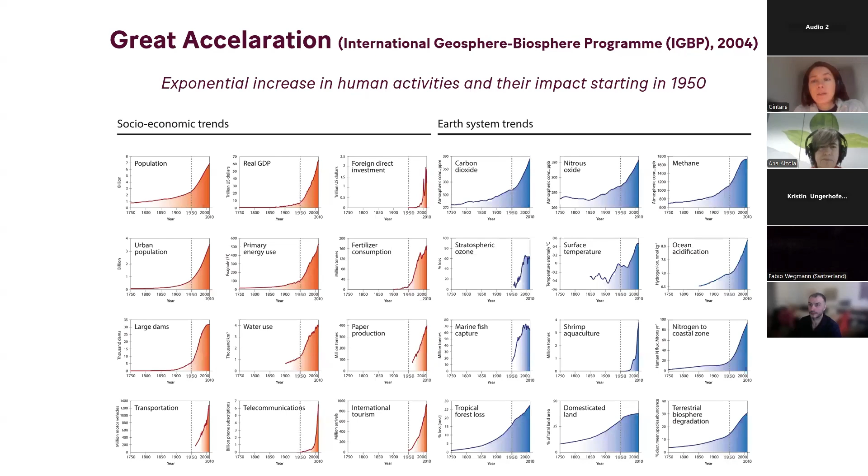So welcome everyone to the session. I will be presenting the results, insights from my recent research project, which is about designing for vital soil in urban areas. First of all, why care about vital soil? We see that since the 1950s, there's an exponential increase in human activities, and these socioeconomic trends have an impact on Earth systems. For example, urban population growth results in soil degradation and more intensive land use.

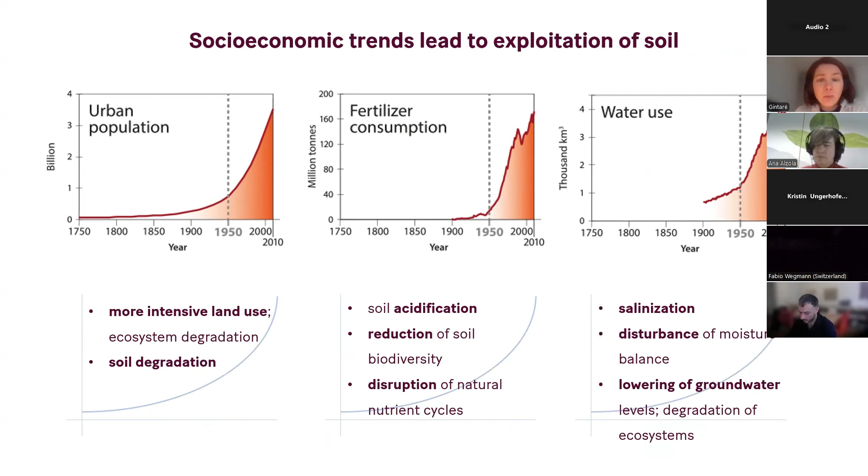Every day in Europe, 184 hectares of land are urbanized. More fertilizer consumption results in soil acidification and reduction of soil biodiversity. Extensive water use leads to salinization and lowering groundwater levels, disturbance of moisture balance. However, vital soils can counteract these negative Earth system trends.

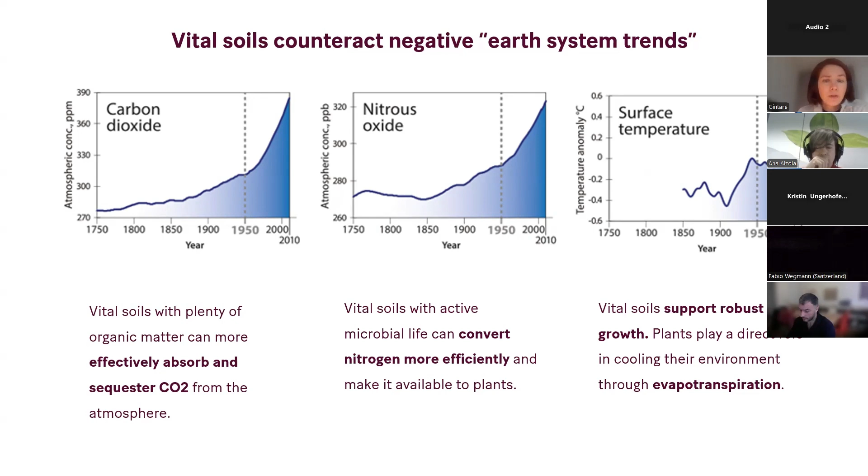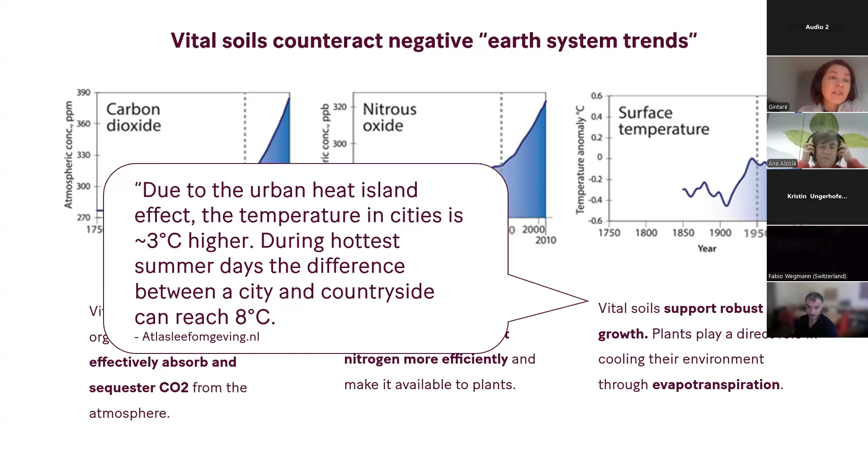Vital soils, especially, can effectively absorb and sequester CO2, also convert nitrogen and make it available to plants, and also support robust plant growth, which is needed to cool the environment through evapotranspiration. And this is especially important in urban areas where we have the urban heat island effect with an average higher temperature of 3 degrees, with extreme cases leading to 8 degrees.

But what happens with vital soil in cities? There is a scarcity of space and lack of insight into what lies underground. Since the 1950s, again, we place in the subsurface everything that we don't want to see above the ground, such as parking, cables and pipes, waste containers. And in the Netherlands, only since 2006, we are actually mapping what's being placed underground.

This leads to overcrowding in the subsurface, and yet we still need more space to put installations in relation to the energy transition, such as warmth and cold storage. And these installations alter soil temperature and the water system, and therefore integral planning of the subsurface is crucial for sustainable city design.

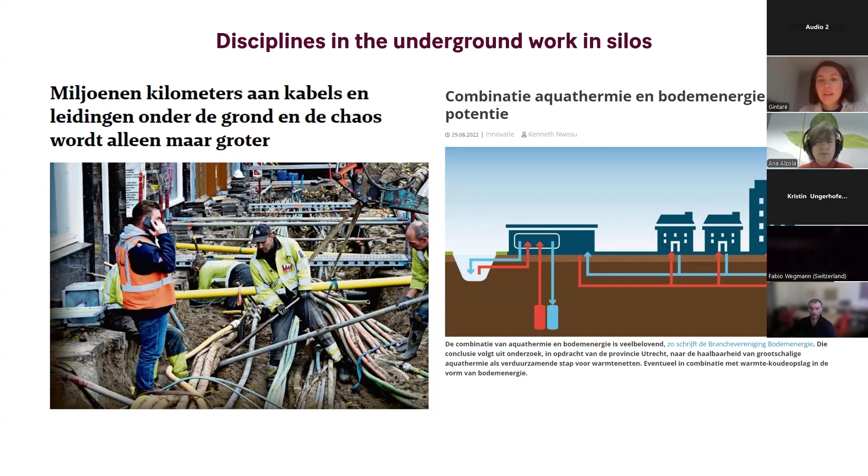On top of all these issues, cities also have high ambitions to make their environments more attractive and healthy for people to live. And there is a wish to add more green, make cities more nature inclusive, climate adaptive. And all these ambitions require more space underground for the vital soil. So with this, we started the research with this question: how do you design for the vital soil?

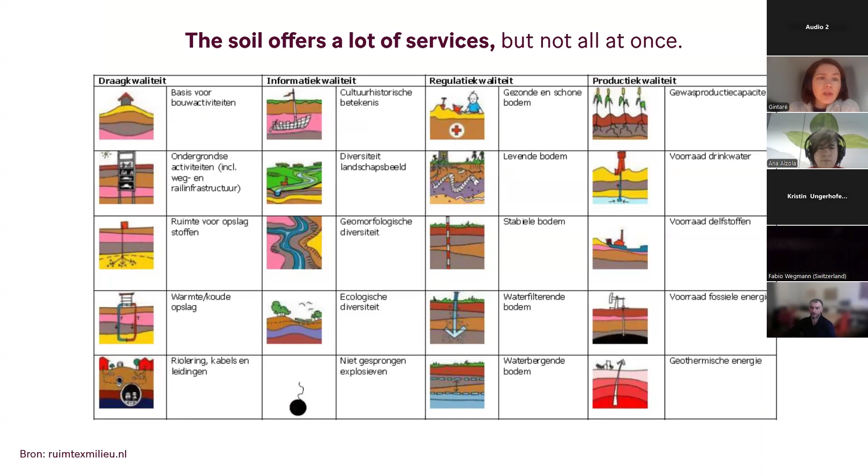We did this research with a large group of experts, which resulted in the handbook on designing for vital soil in urban areas, which is publicly accessible online. At the beginning of the research, we were confronted with the question, what is actually a vital soil? And we know that the soil can offer us lots of ecosystem services, but not everything at once.

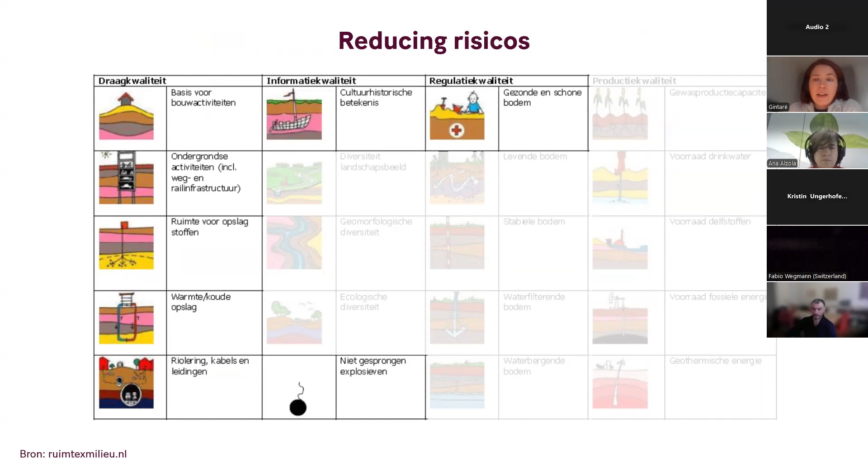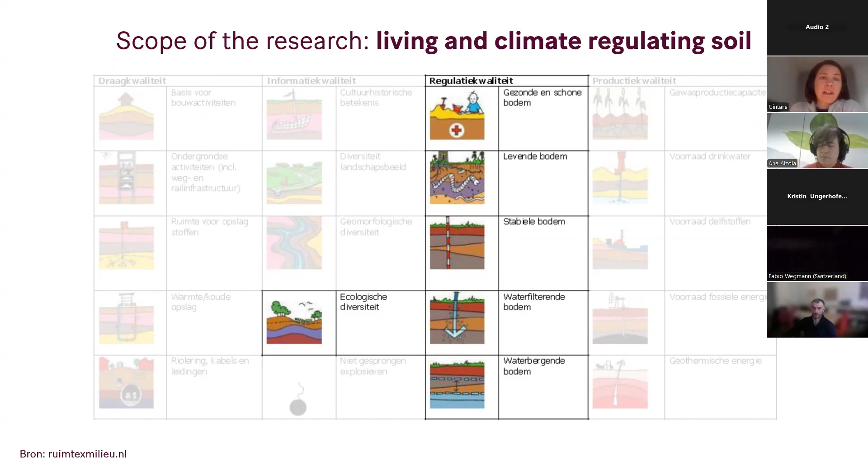We can choose to focus on productive services such as food, drinking water, energy. We can let soil carry our buildings and infrastructure, reduce risk such as pollution, or regulate climate and support our ecosystems. And exactly these services of the soil are our focus area in this research for the vital soil.

So designing for the vital soil starts, first of all, with understanding the site conditions and the soil system in your project area. Then defining ambitions, and on the basis of these two, selecting which measures you need to apply. And this application of measures process is also iterative. You usually sketch several scenarios until the optimized option is achieved.

So how do you read the soil as a designer? Our case is a boulevard in Rotterdam, which represents well the situation of vital soils in cities. 90% of this profile is sealed, and only 10% is green, and this is exactly where we can find, let's say, the richest part of vital soil.

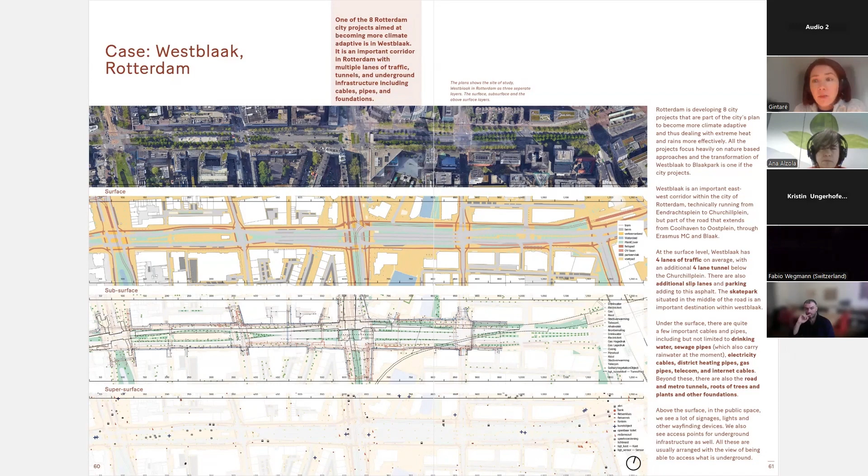Besides the surface cover, we also look at structures underground, such as lines and points, also how the soil was changing throughout time, which then also helps us to understand why certain soil layers are as they are. For example, here, the sand layer was added as a filling of the harbor.

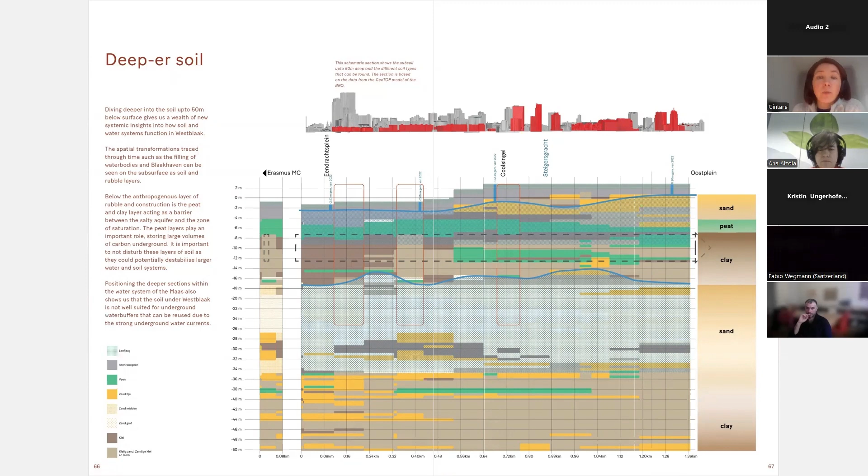We also make a deep soil section to understand the water system, groundwater, aquifers, vertical and horizontal water flows, and soil composition. And then we also zoom in on the shallow surface, because this is the busiest layer in the subsurface. There we find all the infrastructure, and the first 2 meters are the most active with soil life.

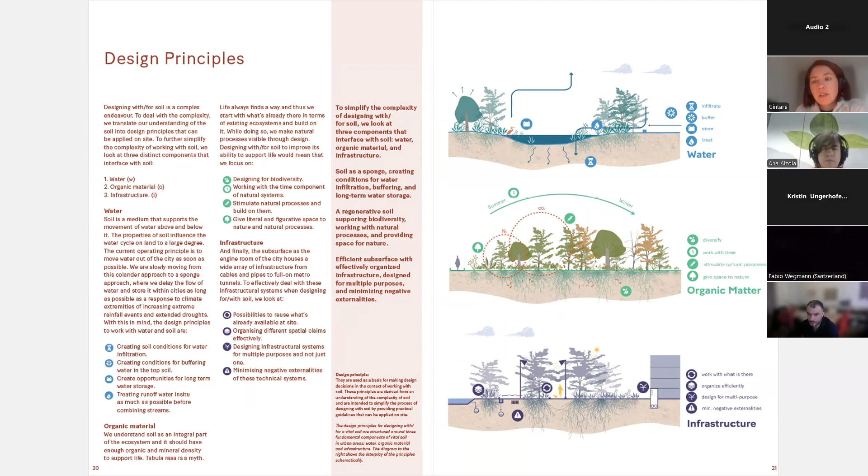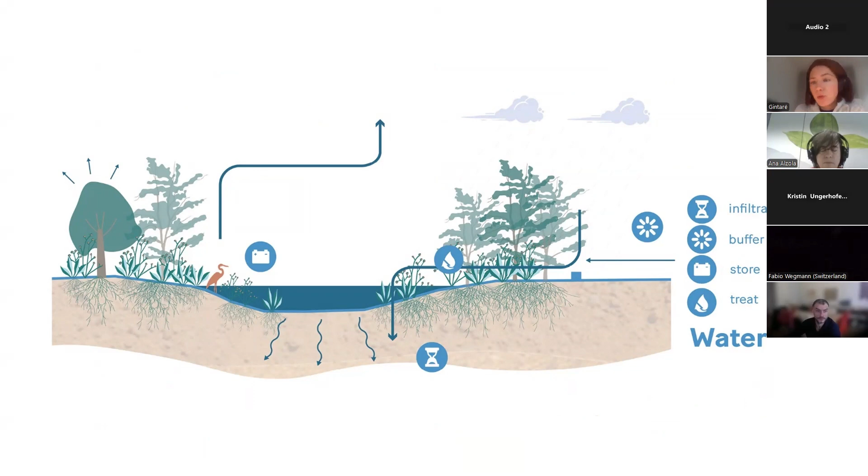So once we know the site conditions, how do we choose the right measures? During the research, during the interviews and workshops with experts, we defined a set of design and maintenance measures, which we categorized in 3 systems: water, organic matter, and infrastructure. Water-related measures aim to infiltrate, buffer, store, or treat water, such as a rain garden or biofilter.

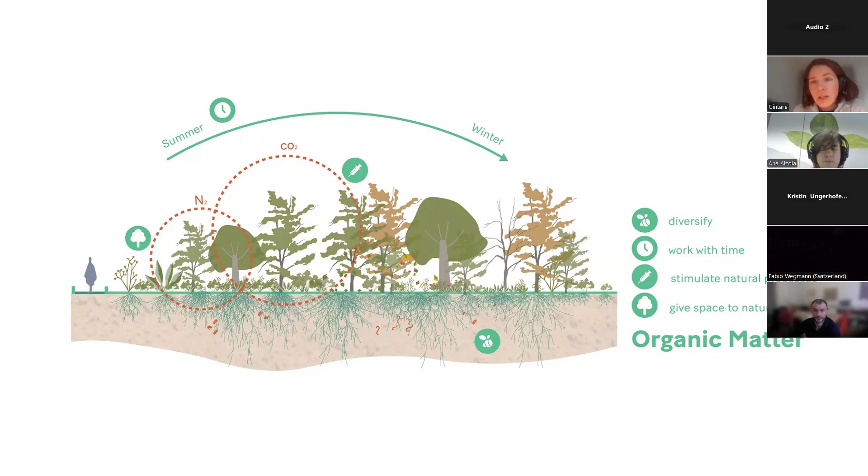Organic matter measures focus on diversity, working with time, stimulating natural processes, giving space to nature, such as creating generous green patches with a minimum of 3.5 by 3.5 meters. That allows enough space for tree roots, and creating the green patch as a mini ecosystem.

But ideally, the bigger the green patch and the more clustering of the green, the better. In bigger patches of green, we can expect and add higher species diversity, and not only focusing on species, but also a combination of plants with different ages.

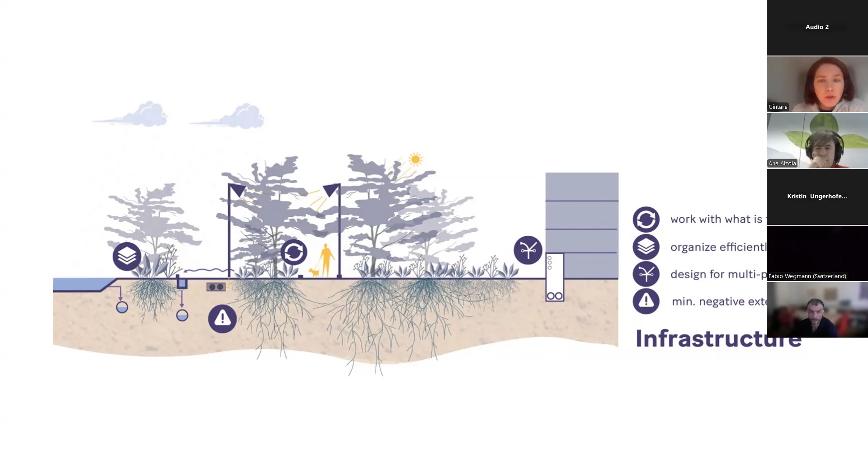Infrastructure measures aim to work with what is there, organized efficiently, designed for multi-purpose, and minimize negative externalities, such as, for example, a parking garage that is also a water storage, or a multi-utility duct where cables and pipes are stacked vertically, and therefore more space remains in a street for the vital soil.

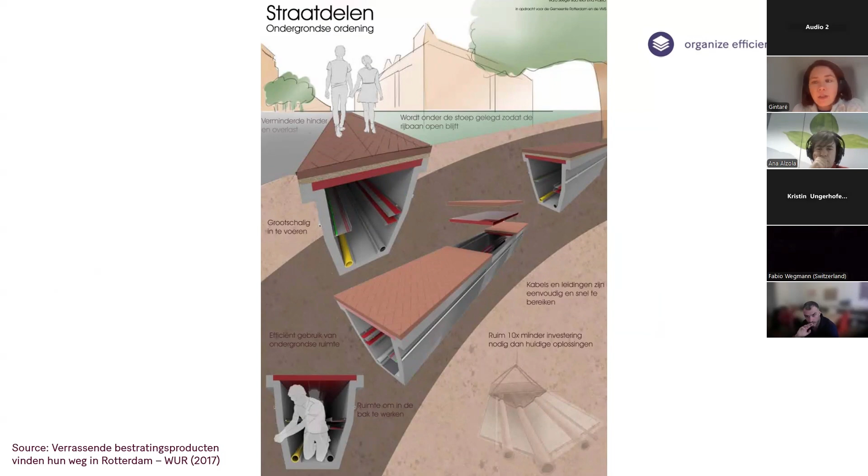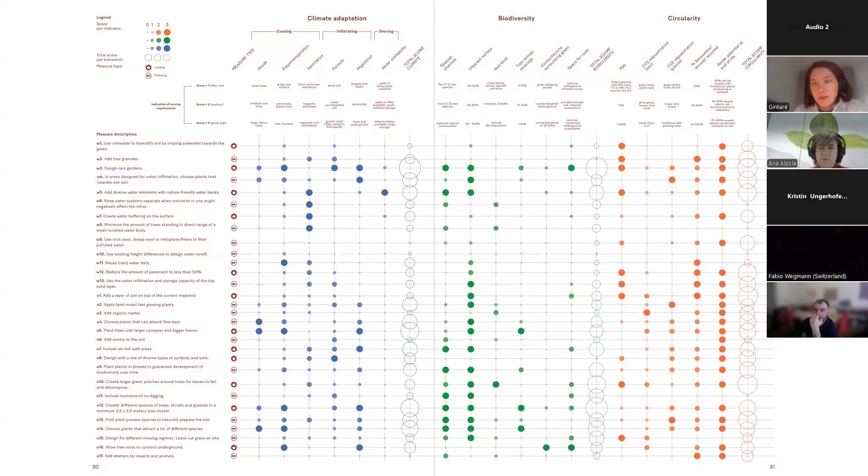When choosing measures, you're often confronted with the question, so which measures perform the best? And therefore, we also looked at 3 topics which are relevant for the city of Rotterdam: climate adaptation, biodiversity, and circularity, and scored these vital soil measures, how they perform per topic. The bigger the bubble, the higher the impact of the measure. Not only we looked at the impact, but also how difficult it is to implement each measure in order to distill so-called low-hanging fruits, so measures which have the high impact and are easy to implement.

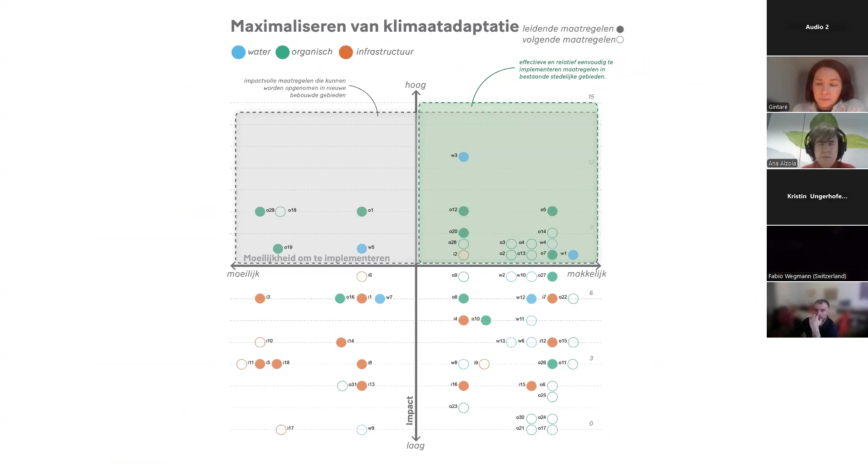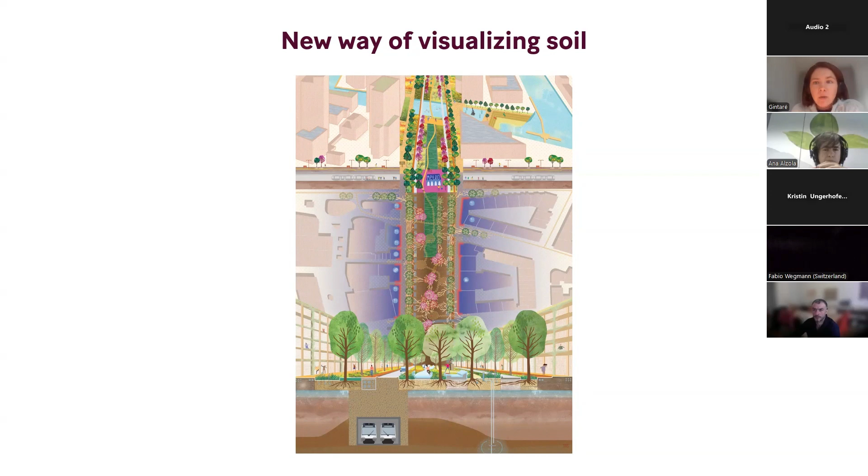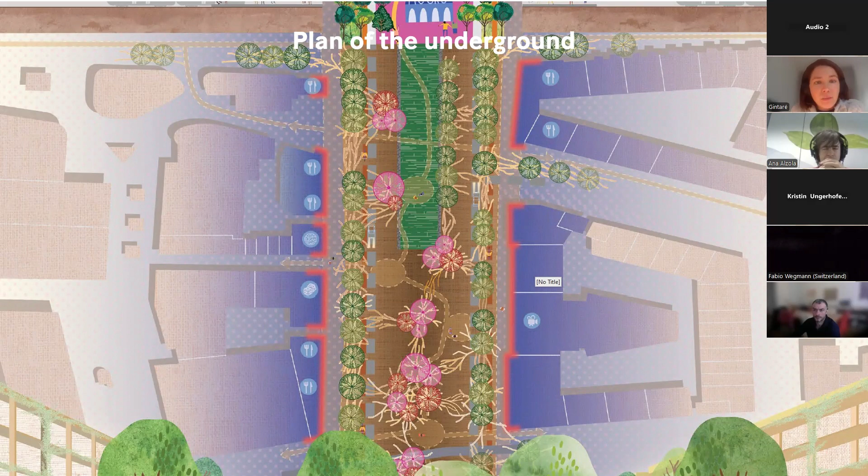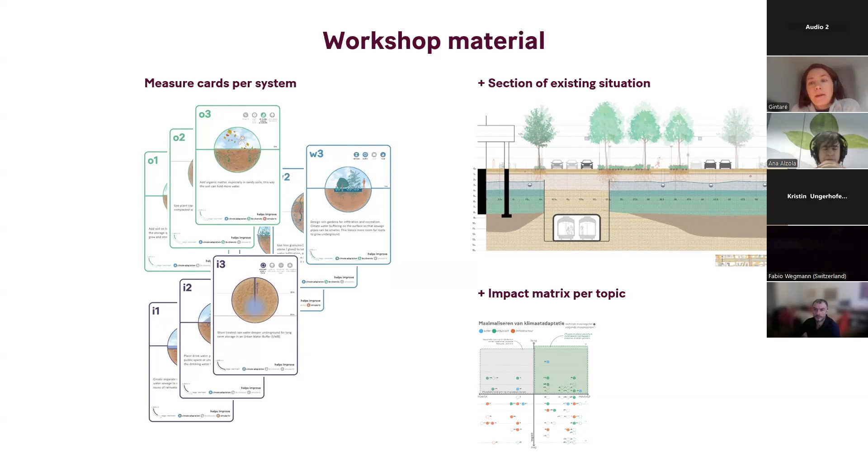And then at the end, the optimized design is chosen, where we also focus really in drawings on giving a fair representation for vital soil, such as showing it in the perspective sections, or drawing a plan of the underground where you see tree and plant roots, all the cables and pipes, and underground installations. And all the results of this workshop, of this research, we bundled in the workshop material in order to share this knowledge also externally.

Thank you very much. Ana, you're muted, if I may. Okay, sorry. Oh, I'm having problems with my mic. So, Joffrey, you are the one who... I was just saying that you were muted. Yes, but I see that you are the one who has this comment for Gintare.

Is it about the concentration of organic matter? Yeah. Thanks a lot for this presentation. That was very, very nice and very inspiring. I was just mentioning that at the beginning you define what a vital soil is according to you, and when you started you said having a lot of organic matter is positive. Well, too much organic matter might also be an issue, so you just have to be careful. It was really a very small detail.

Sorry. Yeah, you're completely right. The soil health is not, let's say, one benchmark that applies everywhere. We know, for example, in Dutch we call it kruidenrijke vegetatie. It's, let's say, biodiverse meadow. That requires quite poor soil. Yeah, indeed.